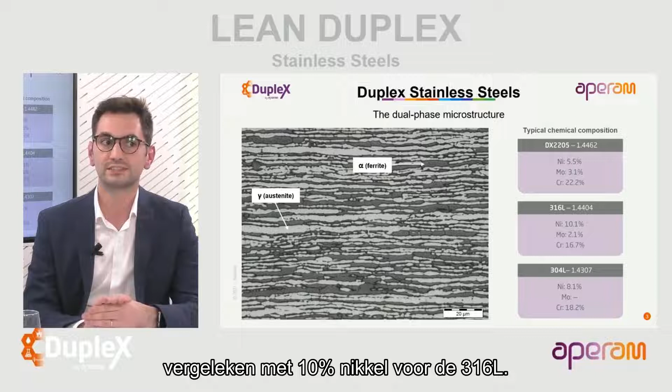We can see here on the right that for our standard duplex DX2205, we have more chromium than for the austenitic grades, the traditional austenitic grades 316L and 304L, but on the other hand, much less nickel. So here we can see that we have about half the nickel, so 5.5% for the 2205 when you compare to 10% of nickel for the 316L. And of course, what's very interesting with duplex is that you have much less nickel, but still you have much higher corrosion resistance and about twice the mechanical strength of the austenitic grades.

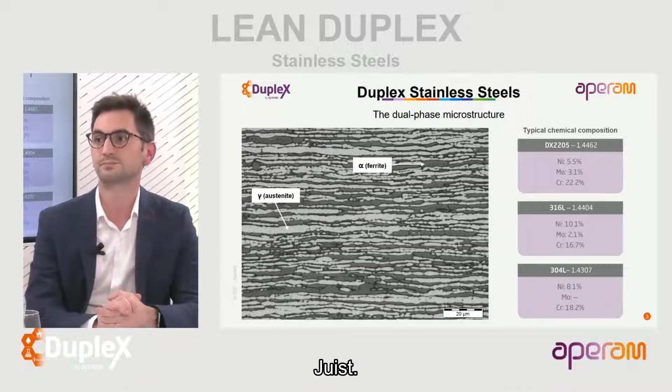So the point of this webinar is to talk about not only duplexes but lean duplexes. What exactly are those? By lean, we mean even less nickel and less molybdenum than for standard duplexes.

So you can see here we have tried to position in terms of mechanical strength and corrosion resistance our lean duplexes DX2202 and DX2304, and compare them to the standard duplex DX2205, but also some other grades. You can see that for DX2202, you have only 2.5% nickel, which is quite low, and almost no molybdenum. And what is very interesting is that the mechanical strength remains quite high because these are lean duplexes, but they still have this duplex microstructure, so about twice the mechanical strength of the austenitics.

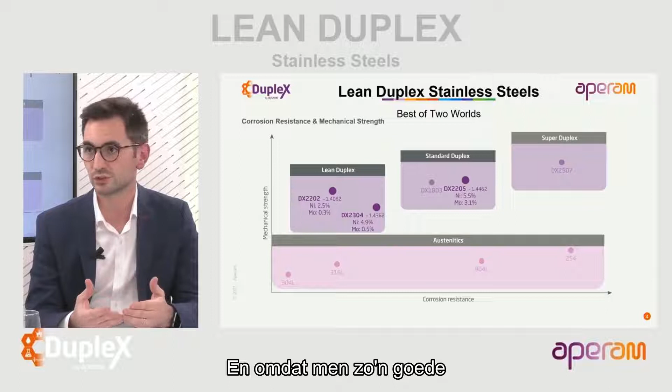And what's also interesting is that their corrosion resistance is, of course, not as high as the corrosion resistance of standard duplex, but it is similar or even better than the traditional austenitic grade 316L. And because you have such good corrosion resistance with such low nickel, it allows for cost reductions.

Now, you've mentioned cost reductions. Obviously, it's a very important point. From what you've been explaining, it seems to me that lean duplexes require quite a complex production process in general. Together with the high prices of raw materials, wouldn't this actually cancel out any savings gained from the reduced use of nickel and molybdenum?

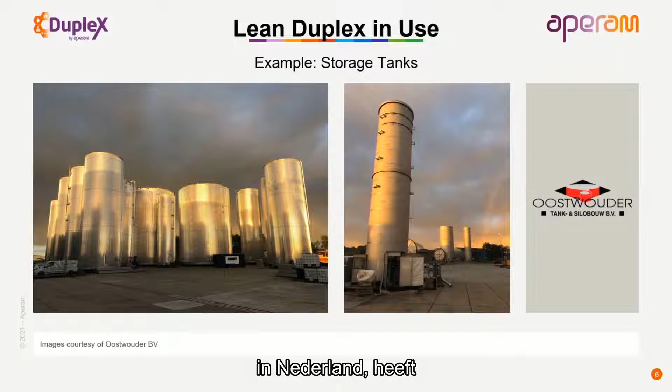And to illustrate this application, there is a picture of one of our customers using lean duplex for the manufacturing of stationary tanks, in white material and also in a wide number of applications. This is a customer of ours called Oostwouder BV in Holland, who has used lean duplex for this kind of project.

Very impressive picture indeed. Can I press you a little bit? What are we talking about in terms of final price? How much? Well, there we could illustrate, let's say, a relative index compared to standard grades 304L and 316L.

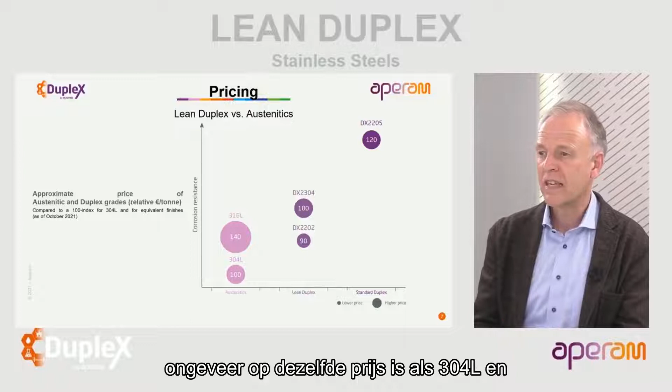So on the table, you see a relative index of 100 for 304L as a reference, expressed in euro per ton. You see clearly that the Lean Duplex is about the same price as a 304L, and that it's 30% cheaper than a 316L, again expressed in euro per ton. And it's also like this, that the properties of Lean Duplex are significantly higher than 316L.

So the combination, as already explained by Charles, of low cost on the one hand, and high properties on the other, makes Lean Duplexes a very attractive alternative for water-related projects, which have traditionally depended on classical austenitic stainless steels. Okay, well, Eric, as you just mentioned, water-related and biogas projects, which is, of course, the subject of today's webinar.

It's a good opportunity to discuss Lean Duplex's relevance. Charles, can you explain to us the link between Lean Duplexes and these particular applications?

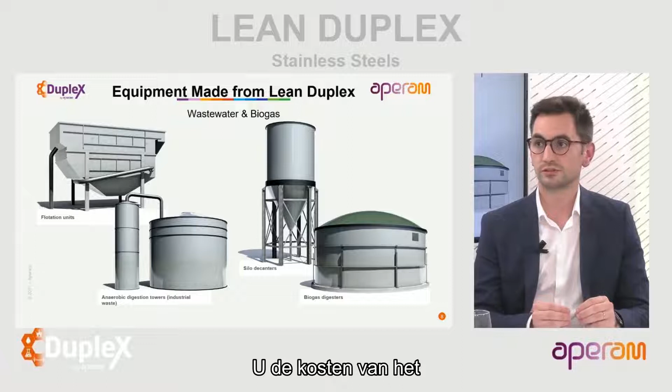Of course. Water, wastewater, and biogas applications have in common the fact that they need equipment in different sizes, including very big tanks and silos. We have some examples here on this slide, like digesters. When you have such equipment in a project, it means very often that this equipment will represent quite a high percentage of the overall tonnage of stainless steel in the project. So when you can reduce the cost of the material used to produce such equipment, you are able to reduce the overall cost of the project.

But in the end, what are the actual key advantages of Lean Duplexes, such as, for example, DX2202? I would say there are three main advantages.

The first one, because we're talking about projects, is price stability, just like Eric just mentioned. When you have such a project, you don't want the price to change between the moment when you build up the offer and the moment when you deliver the equipment to the customer.

The second aspect would be corrosion resistance, because Lean Duplex have a mid-range corrosion resistance, and that's exactly what this type of application needs.

And the third aspect is the possibility of thickness reduction, which means that because Lean Duplex are stronger, you are able to reduce the thickness of the sheets used to produce such equipment, and of course lower even more the costs. Now, you've just mentioned corrosion resistance.

Without getting too technical, so that even I can understand it, why is that so important? Corrosion is important because it can lead to the failure of the equipment. And when we're talking about water and wastewater related projects, you can have, for example, tanks, and if there is some corrosion, they could leak.

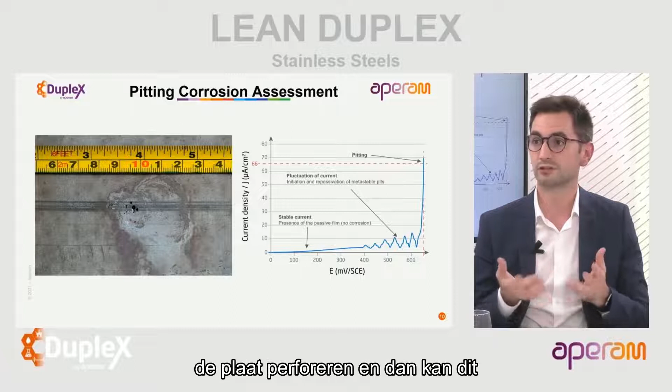We have here on this picture an example of what is called pitting corrosion. Pitting corrosion is one of the most common types of corrosion, and it happens when you have chlorides, meaning seawater, marine air, or brine. It is a very localized type of corrosion, which means it will not propagate all over the surface of the material, but will initiate on very specific and localized spots, and then propagate in depth. When that happens, you can even perforate the sheet, which could lead to leakages, for example.

But fortunately, at Aperam R&D, our colleagues studied this type of corrosion quite a lot using electrochemical techniques, so we try to understand very well the resistance to pitting corrosion of our grades.

Well, how does that work? Can you explain it to me? How does that technique work to understand pitting corrosion? Yeah, I will try to make it simple.

We see here on the right a graph, a curve, that is the result of such electrochemical tests. What we do is sweep the electrochemical potential and check the response of the material in terms of electrical current. We do that by putting a sample inside a water solution containing chloride, so seawater. When you do such a potential sweep, at some point you will be able, just like we see on the graph, to detect a very sharp increase of the electrical current. When that happens, it means pitting corrosion has initiated.

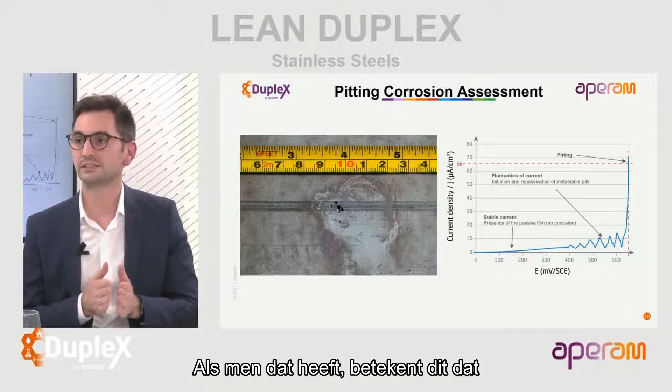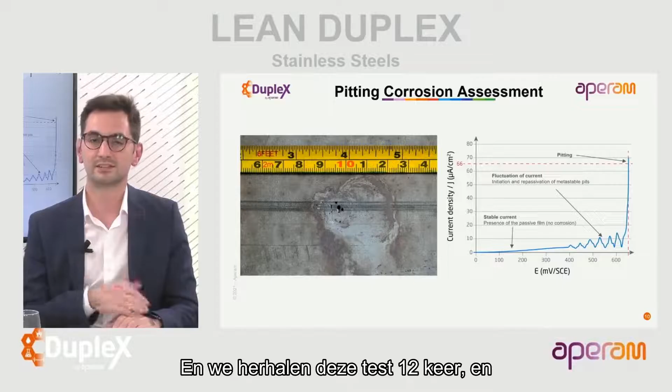So the moment when this occurs, we note that value of the potential, which we call E-pit for pitting potential, and we repeat this test 12 times. Then we keep the worst value, which we call the E-pit minimum, that will be used later on to rank the stainless steel grades.

And how do Aperam's grades perform? We have some information here. We did this test, for example, for Lean Duplex, of course, to compare them to the austenitics, but also standard Duplex.

Here we have results at 35 and 50 degrees Celsius, and what we can see is that the standard Duplex DX2205 has the highest value. Actually, for this grade, you don't even have pitting in this environment because we reach what is called the water stability limit, so the pitting corrosion is not able to be initiated.

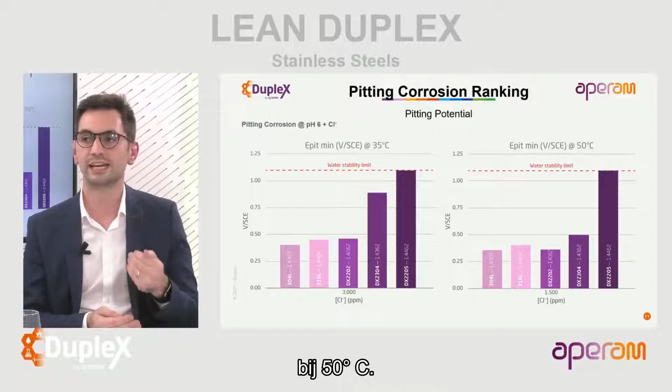If we take a look at the Lean Duplexes, the DX2202 and the DX2304, you will see that the 2304 is better than all the other grades, whatever the temperature. The DX2202 is at the same level of pitting resistance as the 316L at 35 degrees Celsius, whereas it is at the same level of pitting resistance as the 304L at 50 degrees Celsius. That's very important information because it allows us to know the limits of the material.

Now, you talked about pitting corrosion. Does that mean there are other types of corrosion? I presume so. Of course, there are a lot of types of corrosion. We can mention another type, which is called crevice corrosion.

We can see some pictures here, very impressive pictures actually, from equipment from desalination plants. This type of corrosion is also a localized corrosion. It happens when you have a very tiny and confined space, for example, behind a screw head or a bolt, and when the brine is able to go inside that space, but since you're not able to renew the environment, it will lead to a very severe type of corrosion. So that's crevice corrosion. It can happen, and that's why we also study it.

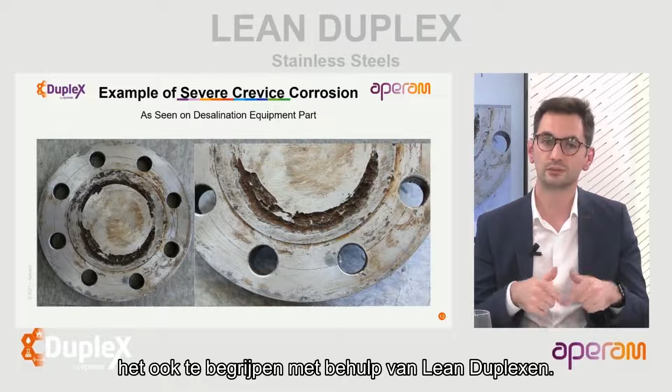And by the way, there is a very recent study funded by the European Union that tried to understand this, and also understand it using Lean Duplexes. That sounds fascinating. I'm learning so much about this. What else did this study tell you?

So this study was, as I mentioned, funded by the European Union. It was led by the French Corrosion Institute together with Veolia, which is one of the major players worldwide in terms of water treatment and water management. It actually tried to assess different stainless steel grades in order to use them for the construction of wastewater plants.

So I could mention one of the tests that were carried out. We can see here it was the crevice corrosion test using the CREVCORR methodology. Without going too much into details, because this study is public and was published in a scientific journal, we can see in this table here that when you have a condition indicated in green, it means that steel passed the test. When you have a red cross, it means that it failed. And when you have green and red, it partially passed.

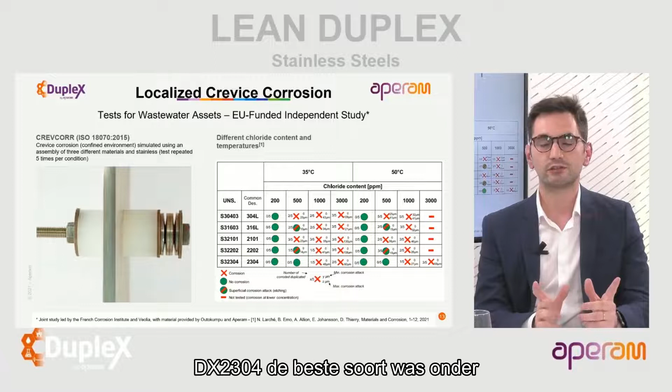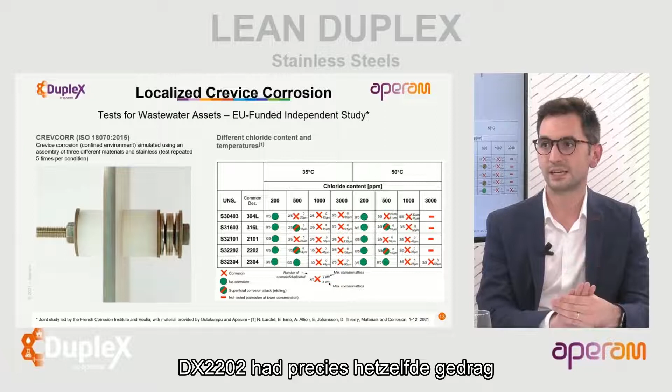But what is important here is that the 2304 was the best grade among the Lean Duplexes and austenitics. Also very interesting is that our DX2202 had exactly the same behavior as the 316L. That's a very important result for us.

Now, in terms of thickness reduction, it's obviously also a key advantage because it can bring additional cost reduction, I imagine. Can you tell us about that? Of course, that's one of the main advantages actually of Lean Duplex as well.

We can see here that I was talking before about the mechanical properties of Lean Duplexes. We can see the yield strength, for example, which is a very important mechanical property of the material. For the Lean Duplexes, it will be comprised between, let's say, 530 and 550 megapascal. You can compare that to the typical value for austenitics, which is more or less 300 megapascal. So we're talking about almost twice the yield strength, and that's the value that will be used in order to know if you can reduce the thickness of the sheets or not.

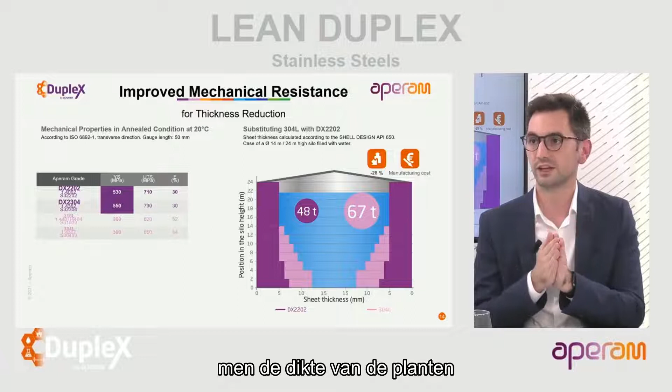So it means we can, and we have the example here of a silo filled with water. You see the design here. Previously, this type of silo was made of 304L. It needed 67 tons of 304L, and now it is made of DX2202, and it needs only 48 tons, which means 28% less material. And then you can also imagine that you will have savings with other parts of the project, such as the transportation, for example, and also the manufacturing. You could also think about the welding, for example.

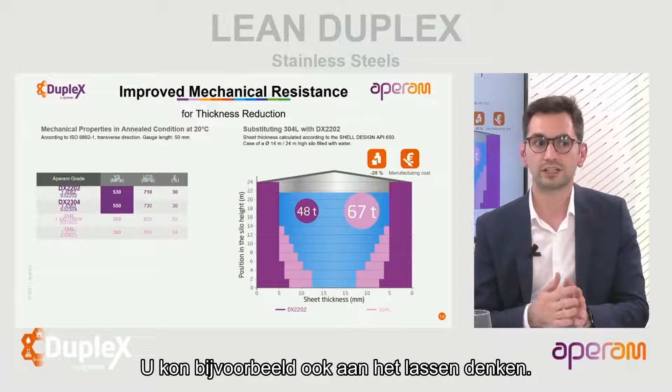Now, as you mentioned welding, I'm sure that will interest people who are watching us, since they might be wondering if the internal processes like equipment manufacturing would change if using Duplex. Can you tell us a little bit more about the welding of Lean Duplexes compared to traditional grades? Yes, of course. This is a very important point because customers want to know how the welding of Lean Duplex is when compared to the austenitics. We must say that it is very easy. With Lean Duplexes, you can use any traditional welding process like TIG or laser welding. We have the examples here in this table.

The only small adjustment you have to make in order to weld Lean Duplex is that you have to choose the right filler metal for the welding. But the good news is that it's exactly the same filler metal used for standard duplex, the DX2205, which is widely available.

The other point is that you have to have a little bit of nitrogen in the composition of the welding gases. Why? Because when you weld Lean Duplex, you get a bit more ferrite than austenite generated during welding. Adding nitrogen to the gas counterbalances that effect and allows you to keep the right austenite ratio in the microstructure.

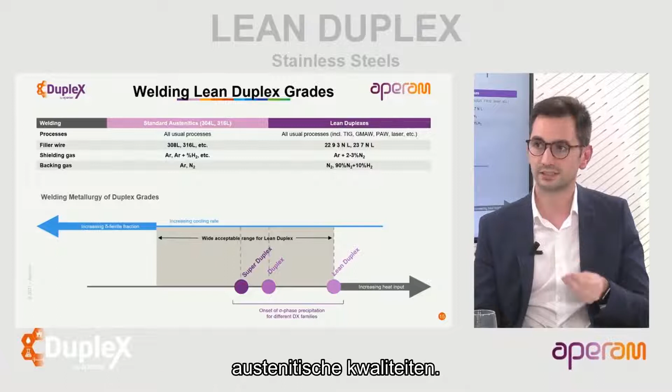I'd also like to point out, though it's not written here, that Lean Duplexes can easily be welded to austenitic grades. That's a very important point - there's no problem, and we're actually carrying out a study right now together with Veolia to improve and adapt our products even more for that, because you can imagine having vessels using Lean Duplex with pipes, for example, in austenitics.

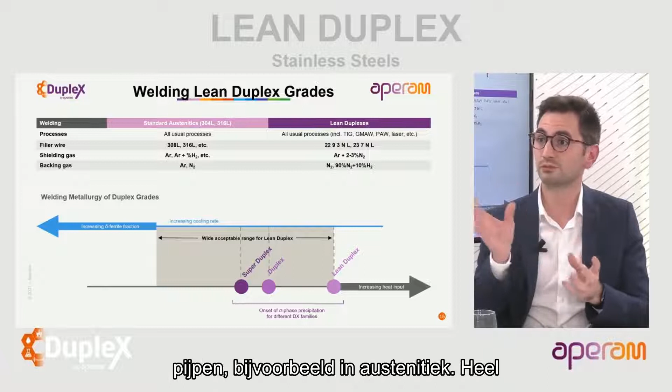Thank you very much for those insights. I think we've all understood that much better now, thanks to Charles. What are the advantages of lean duplexes? Perhaps this is the opportunity for you, Eric, to tell us what are the advantages of working with Aperam.

I would like to point out three things regarding these advantages of working with Aperam. First, Aperam is a supplier of choice for the customer, as we offer a very complete and high value product portfolio to the marketplace. Secondly, we have a global and highly integrated service and solution network, which provides proximity to the marketplace and to the customer, a key element of our strategy. Third, we have the ability to support innovative and high-performance solutions through industry-leading technical and R&D competencies, which creates added value for our customers. These are the three key points I'd highlight in terms of Aperam's positioning versus the marketplace.

In terms of Aperam's recent announcement about becoming the first stainless steel company to be certified by Responsible Steel, it would be fair to say Aperam offers a significant sustainability advantage. Sustainability is at the heart of everything we do at Aperam. We not only responsibly produce solutions that are 100% recyclable, but we also have the best-in-class CO2 footprint. The Responsible Steel certification helps give our customers irrefutable proof that the stainless they purchase has been produced in accordance with the highest standards of ESG practices, defined jointly between steel makers and demanding environmental and social NGOs.